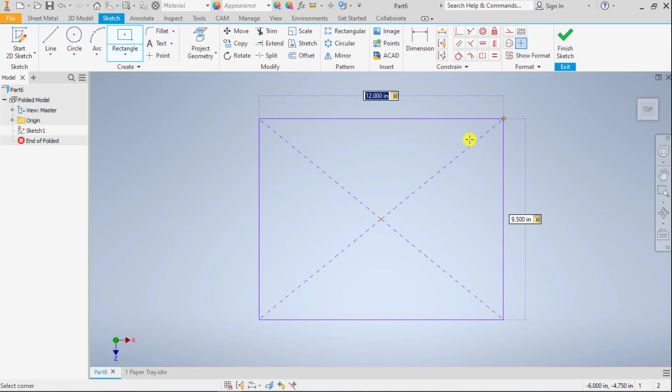We have a base size of our top view here of 12 by 9.5. So we're going to go back to our part, create a sketch on the top view, always double checking that top reads correctly. 12 by 9.5, and our metal thickness is 0.05. So we're going to go to our sheet metal defaults, click the pencil to edit, and change our thickness to 0.05. Save and close, and cancel.

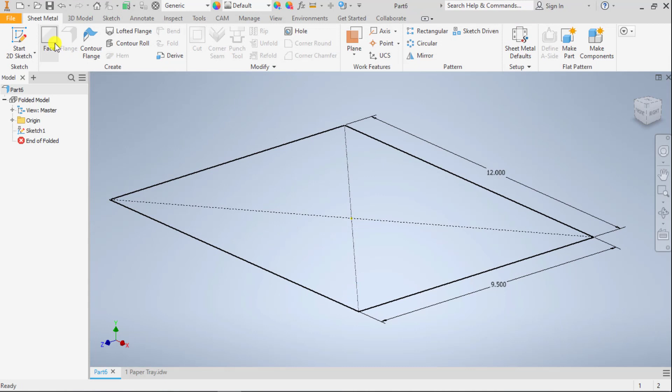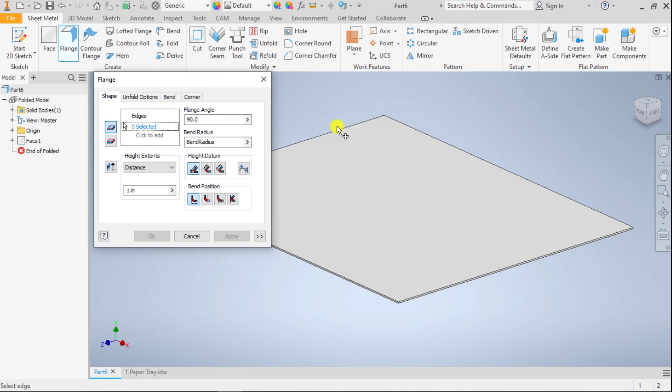Our first face then gets applied, and we have a 1.5 inch flange on the back, but we notice that we've got a taper here of 3 degrees on the sides. So we're going to go ahead and do this in two different steps. We're going to create a flange off of our 3 edges of 1.5.

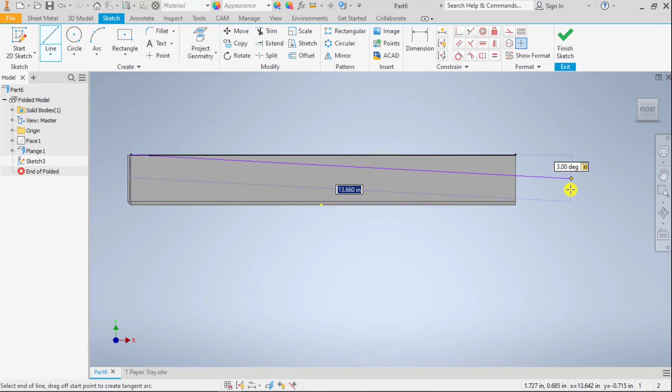Then we're going to create a sketch on the front face of this flange, drawing a line from here down at an angle of 3 degrees. My distance doesn't matter as long as it's outside, so I'm just going to draw kind of a funky looking triangle shape. The only thing that matters is 3 degrees, the start point, and that this comes out past the edge of my solid. The rest of this is just required geometry to close up the shape of our cut profile.

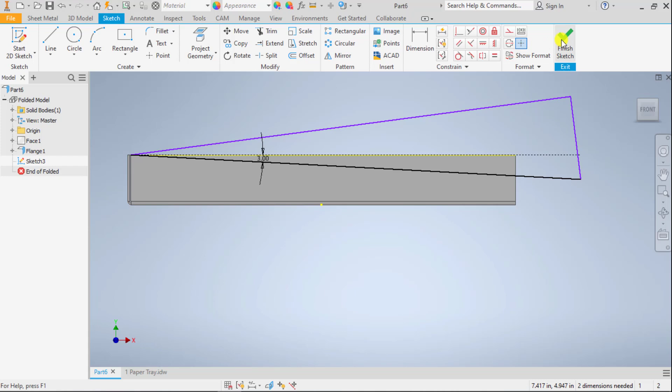So finish sketch, we're going to go ahead and extrude that as a cut through all. And there is our taper.

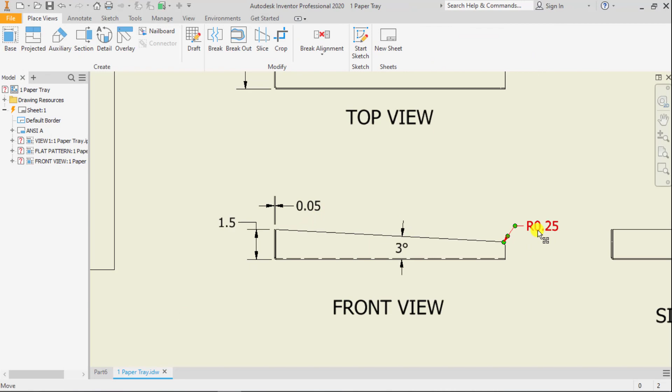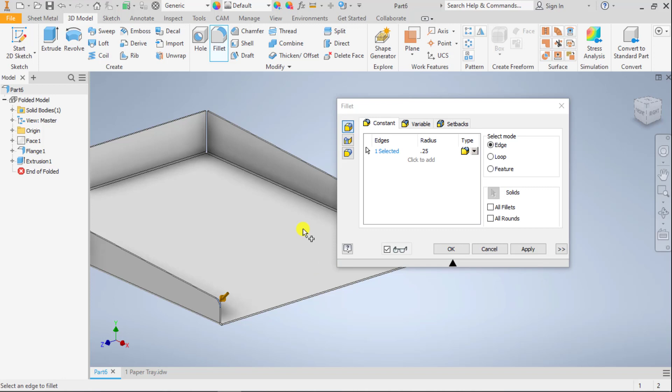And the last thing we need to put on here is this 1/4 inch radius with a fillet. Go to 3D model, click fillet, 1/4 inch radius, and select our edges. There we go, and pick our 2 edges, and we are good to go.

Now we'll go ahead and save this paper tray.

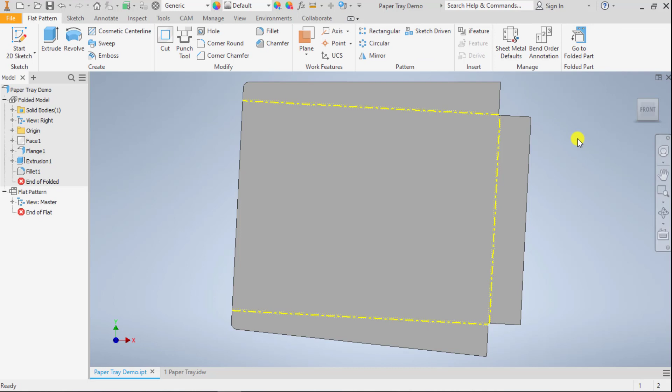What we're going to do is also, while we're at it, create a flat pattern, because we're going to need that. We'll go back to our folded part, create a new standard IDW, edit our sheet to make it B size, and delete our title block, insert the ANSI A like we've been doing.

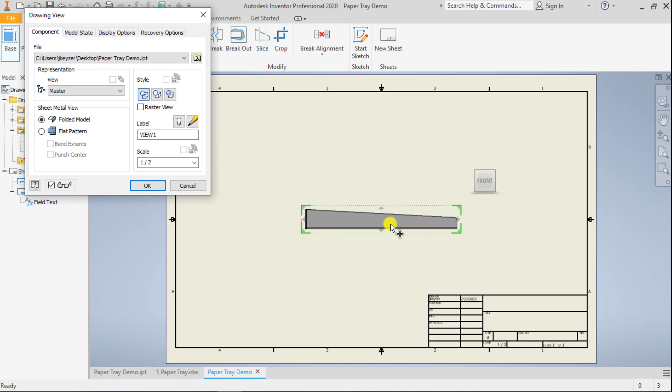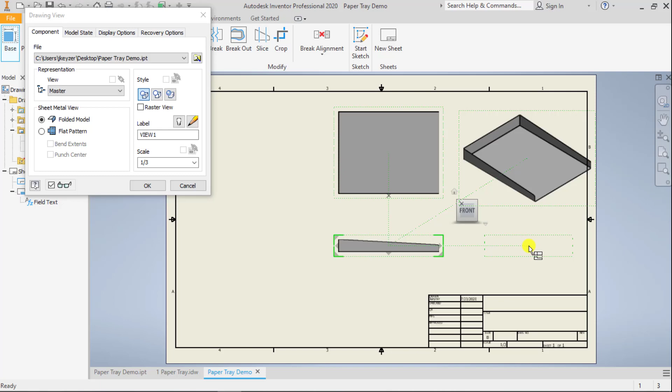Base view is going to be our front. This will give us our top. We can see we're kind of running out of space, so let's make this down to a 1/3 scale. And our ISO, okay, so we have a side view also, so we'll go ahead and throw that in and hit OK.

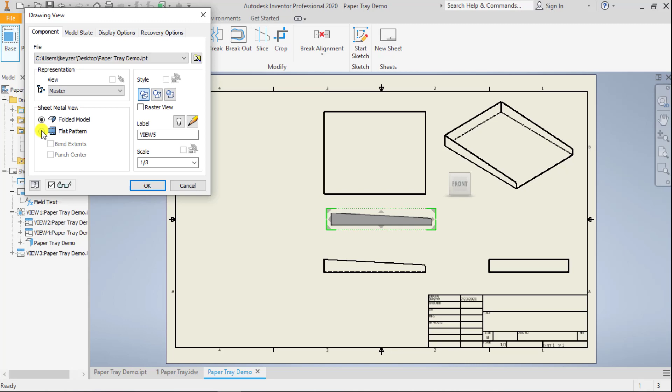Now we can move our views to kind of clean things up. We're going to place a base view of our flat pattern. Since this is a sheet metal part, we have our flat pattern option here. We're going to place that.

This view is on an angle. We're going to right click, rotate, and make that negative 3 degrees. The other way we could have done this is we could have clicked this edge as a vertical reference, but I wanted to show you that we can change it by a given angle also. And we're going to say OK.

And if we compare that to our drawing here, everything looks good. The one thing that we typically do, everything looks really kind of thick here. We'll go to our Annotate tab and our Layers, then Visible ANSI layer. We want to change the thickness of that to maybe 3 thousandths, and that'll make everything look thinner lines. It makes it look a little bit better when you're working with thinner parts like sheet metal parts.

And then all we would do is go ahead, add our view labels and our dimensions like we always do on an IDW. There's no difference between a sheet metal and a solid part that's not sheet metal. That's going to conclude this tutorial. Thanks, and we'll see you in the next one.